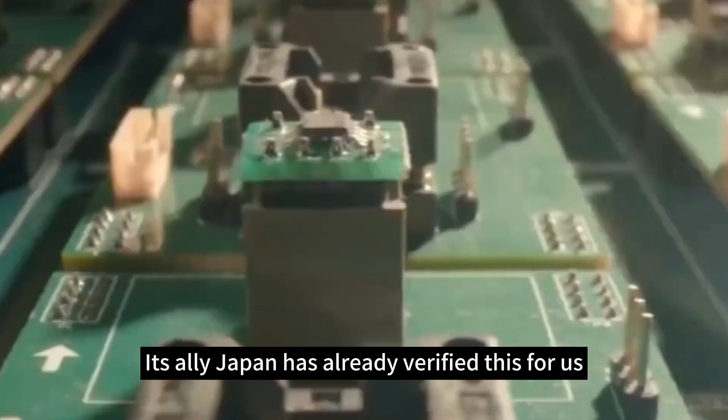In the 1980s, Japan spared no effort to support this leading industry, but the US immediately pressed the stop button on Japan's semiconductor development. They forced the Japanese government to sign the US-Japan Semiconductor Agreement, taking away Japan's exclusive technology at the time. In the face of interests, the so-called alliance is nothing more than a victim that can be abandoned at any time. Although Japan's semiconductor industry cannot be said to have collapsed, it no longer has its former glory and has suffered a major blow.

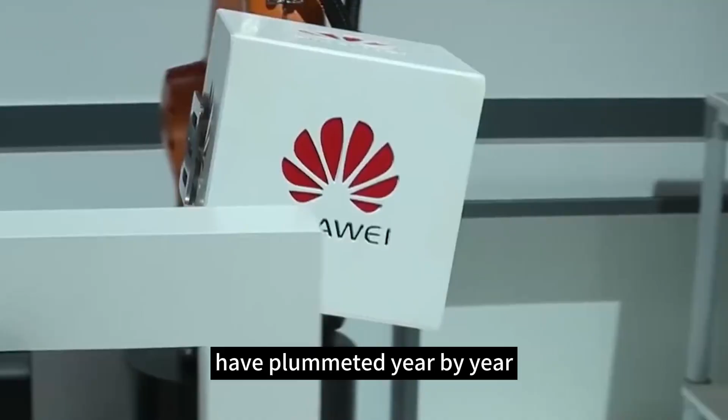Since the start of the Sino-US chip war, with the continuous development of local enterprises in China, Chinese-made chips have slowly begun to circulate domestically. As a result, the profits of Samsung, South Korea's leading company, have plummeted year by year. The United States has also continued to carry out sanctions against South Korea, and Samsung faces huge fines.

This time it is China's turn to develop its manufacturing industry. Like Japan, the development momentum is quite rapid, but China is different from Japan — China is no one's ally. China's leading companies, represented by Huawei and ZTE, show this clearly. From Meng Wanzhou's detention on trumped-up charges, we could guess that Huawei had not been forgiven. Even if Ren Zhengfei flew to the United States in person to apologize, it would be of no avail. This company no longer represents only Huawei itself, but the embodiment of China's advanced manufacturing industry. Therefore, it is impossible for the United States to let it go — let alone China, which is taking American profits. The United States itself values Huawei's place in this industry even more than China does.

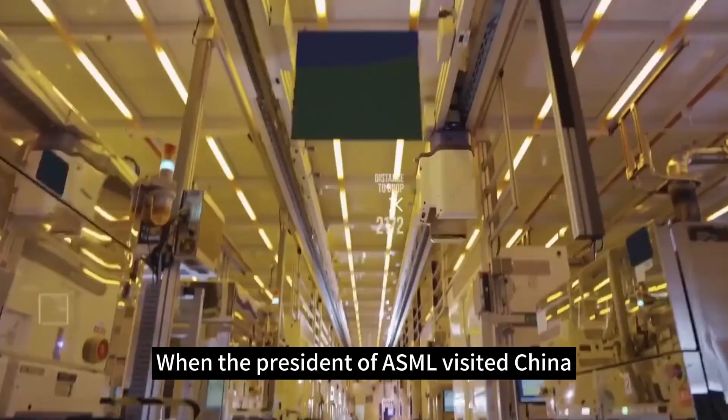But why did the U.S. sanctions only last for such a short period of time? When the president of ASML visited China, he personally said he had obtained a license to supply chips to Huawei — it had only been a few months. Sanctions against China are equivalent to draining their own firepower. What the US lacks most is this kind of tenacity.

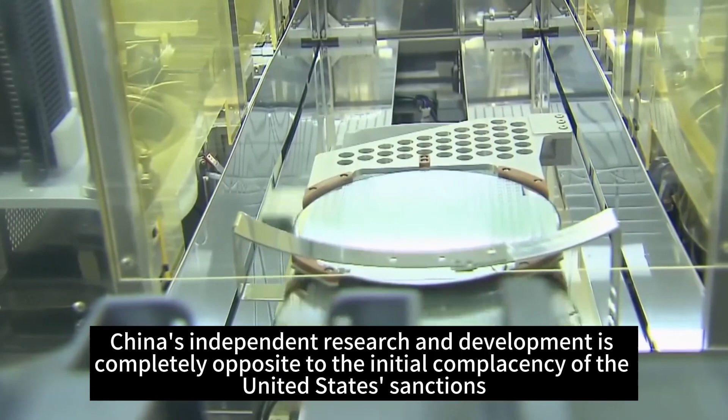Seeing Huawei invest hundreds of billions to build HiSilicon, watching them analyze data and design their own systems — China's independent research and development is completely opposite to the initial complacency of US sanctions. Coupled with the loss of order market from Qualcomm and ASML to China, the United States began to reflect on its own sanctions policy.

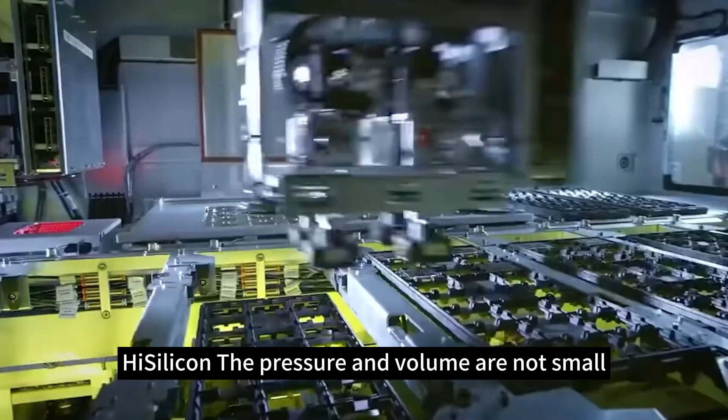After careful consideration, the Americans decided the best option was to lift some restrictions and sanctions. Why? Restoring the supply of Qualcomm and ASML can squeeze MediaTek's current share in the high-end market, allowing them to continue opening up the Chinese market. Instead, they want to use this opening to get Huawei to voluntarily give up HiSilicon's independent research and development. After all, the pressure and volume of HiSilicon are not small, and Huawei's recent financial report is not very good — so maybe Huawei will automatically give up on the gold-eating beast that is HiSilicon.

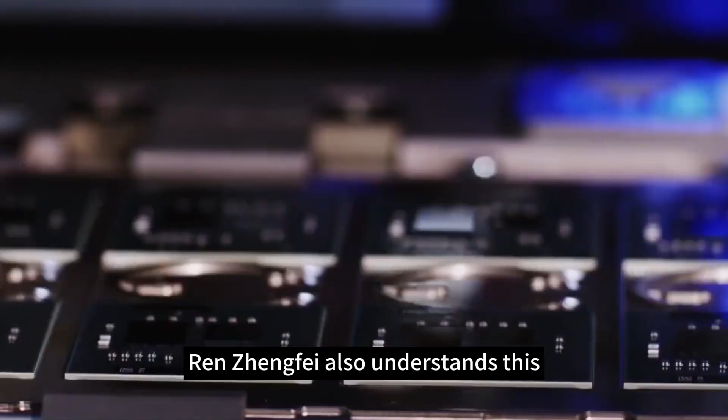Of course, Ren Zhengfei also understands this. For Huawei, which has already spent hundreds of billions and carries too many expectations, there is no way to force them to give up now. China is not a weak country — it will never be willing to be subordinate to others, and it is also impossible to be controlled by others. Therefore, Ren Zhengfei made it clear that HiSilicon has no profit requirements and will not reduce its personnel.

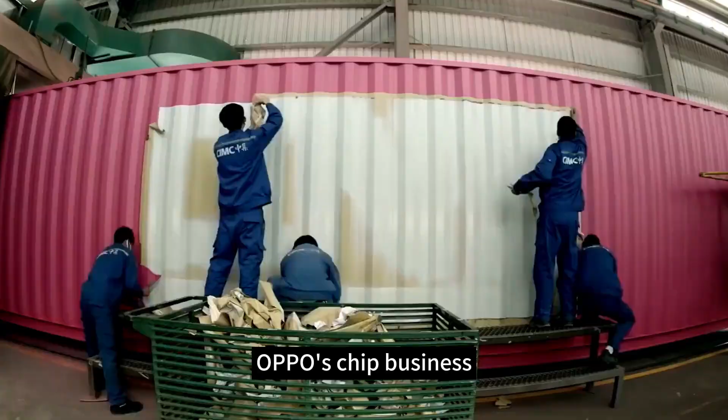When the United States launched sanctions, it was afraid that it would be the next to be sanctioned. OPPO's chip business, which invested 50 billion yuan in research and development, was also forced to shut down. This must be a helpless move for the company if they want to continue to survive. Relatively small companies have no choice but to give up.

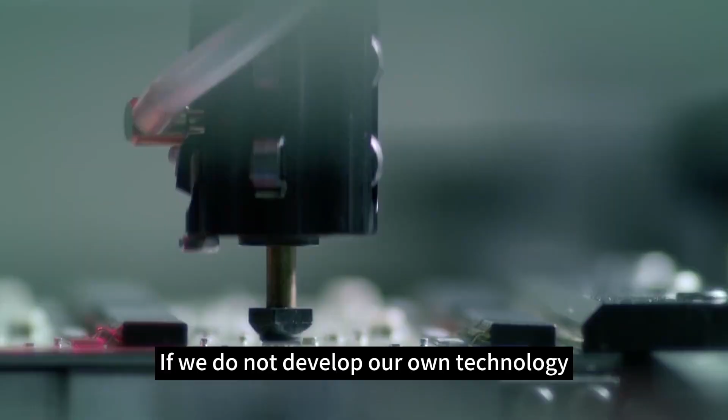These hegemonic hands have been stuck on the necks of the Chinese people for too long. If we do not develop our own technology, if we are blinded by the sugar-coated bullets of temporarily lifting the ban today, in order to save money, we choose to rely on imports. If a conflict occurs, we will still be dumbfounded in this war without gunpowder.

The Japanese government volunteered to ban the supply of various equipment from its own country to China in order to express its unconditional support for the United States' decision. With the lifting of the ban on Qualcomm and ASML, Japan has become the biggest joke. Not only was it stabbed by its ally the United States, but it also gave up its market share to it in vain.

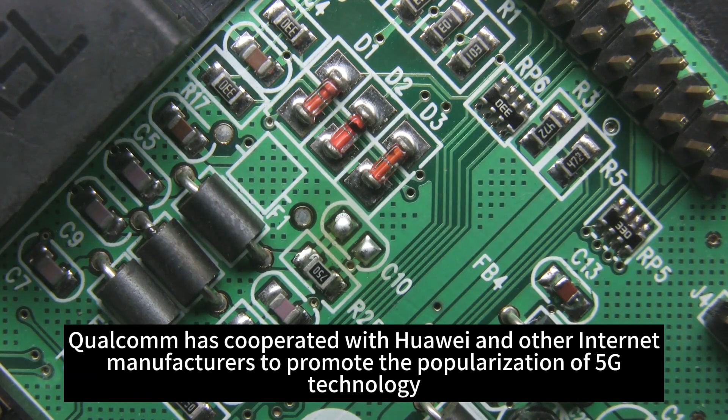The history of cooperation between Qualcomm and Huawei can be traced back many years. Qualcomm has cooperated with Huawei and other internet manufacturers to promote the popularization of 5G technology. Due to the ban imposed by the U.S. government on Huawei, U.S. companies such as Qualcomm have had to interrupt their supply to Huawei. This has led to bottlenecks in Huawei's production and business.

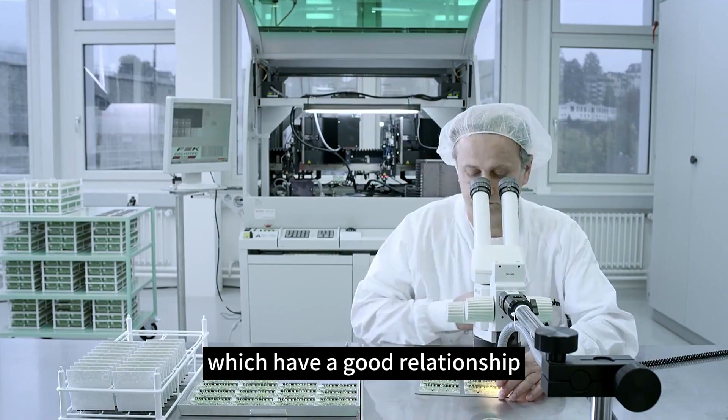It is expected to alleviate the supply chain pressure faced by Huawei and help Huawei accelerate the development of its 5G business. Going forward, resuming supplies to Huawei would also benefit Qualcomm. In addition, the cooperation between Qualcomm and Huawei, which have a good relationship, has also brought more opportunities and challenges to the two companies, supporting the resumption of supply to Huawei.

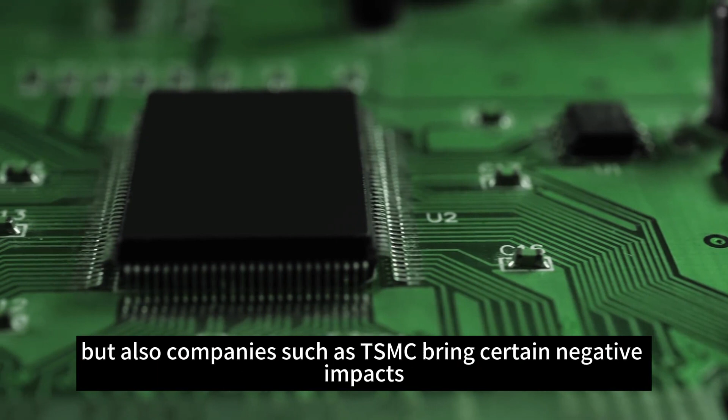As one of the world's largest foundries and semiconductor manufacturing companies, TSMC is very sensitive to the U.S. government's sanctions and controls on Chinese companies such as Huawei, because the U.S. government's actions will not only affect Chinese companies such as Huawei, but also bring certain negative impacts to companies such as TSMC.

With the outbreak of the COVID-19 epidemic and the downturn of the global economy, various countries are strengthening the development of local industries, and also proposing more economic protectionist policies. These policies will not only have an adverse impact on international trade, but also potential negative impacts on the semiconductor industry.

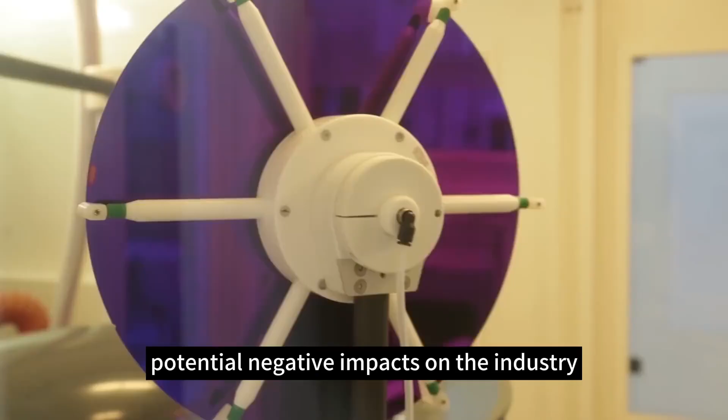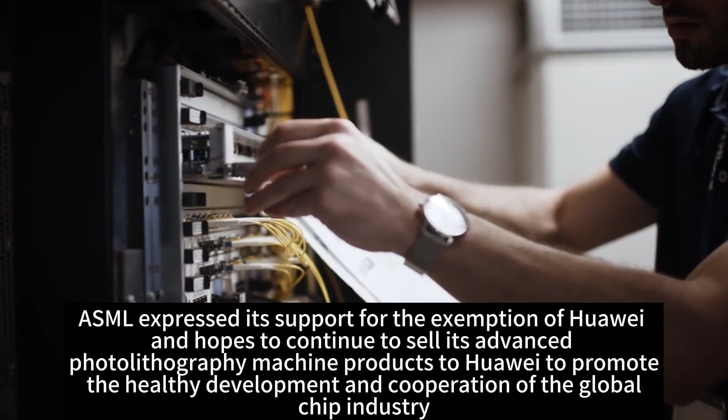The lithography machines it manufactures play a very important role in the chip manufacturing process. The U.S. government's controls on Huawei also include restrictions on the company's ability to purchase U.S. equipment and technology. Therefore, Huawei cannot purchase ASML products, which is also a loss for ASML. ASML expressed its support for the exemption of Huawei and hopes to continue to sell its advanced photolithography machine products to Huawei to promote the healthy development and cooperation of the global chip industry.

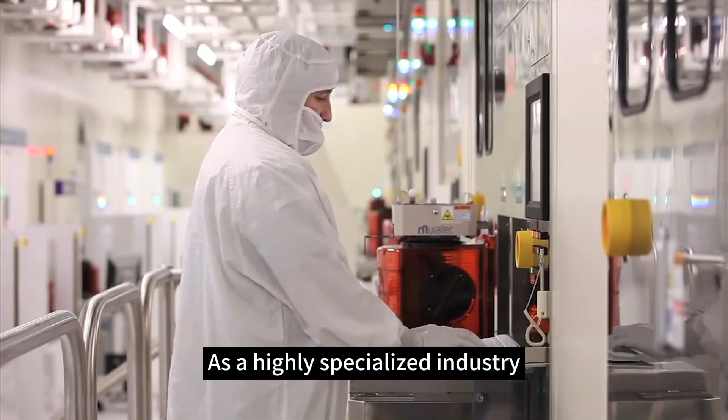Openness and cooperation are the keys to advancing technology and industry. Enterprise cooperation is the key to the healthy development of the semiconductor industry. The semiconductor industry is the most competitive industry in the world, including manufacturing, foundry, design, testing and many other aspects, as a highly specialized industry. The semiconductor industry often requires close cooperation between various enterprises to ensure product quality and production efficiency.

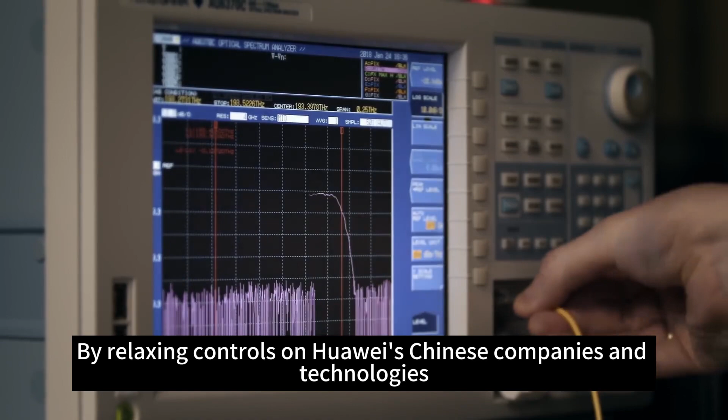Especially in the current global economic downturn, companies are eager to find new business opportunities and seek more development opportunities. By relaxing controls on Chinese companies and technologies like Huawei, we can promote multi-party cooperation and jointly promote the development of the global semiconductor industry. Qualcomm's resumption of supply to Huawei and the statements of companies such as TSMC and ASML have provided the semiconductor industry with more cooperation opportunities and development space.

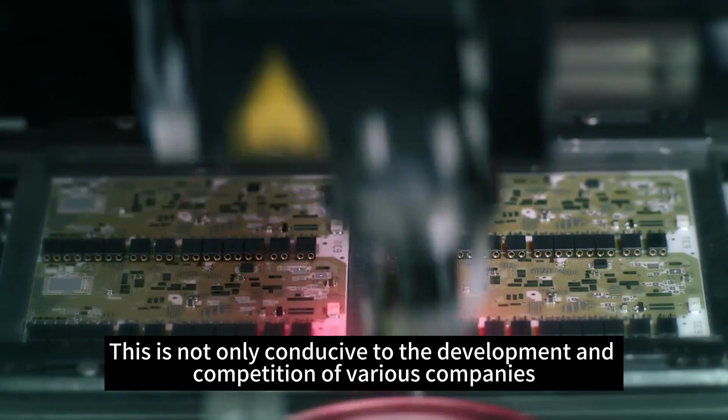This is not only conducive to the development and competition of various companies, but also conducive to promoting the healthy development and cooperation of the global semiconductor industry. Only continued openness and cooperation can bring more opportunities and challenges to the semiconductor industry, and promote the continuous progress and breakthroughs of semiconductor technology.

China has made good news in the chip field, and good news about breakthroughs is emerging one after another. For example, the first Chinese-made 7nm GPU chip was launched in Shanghai. A Chinese company released a fully self-developed cloud 7nm chip, and even an automobile manufacturer developed a 7nm cockpit chip.

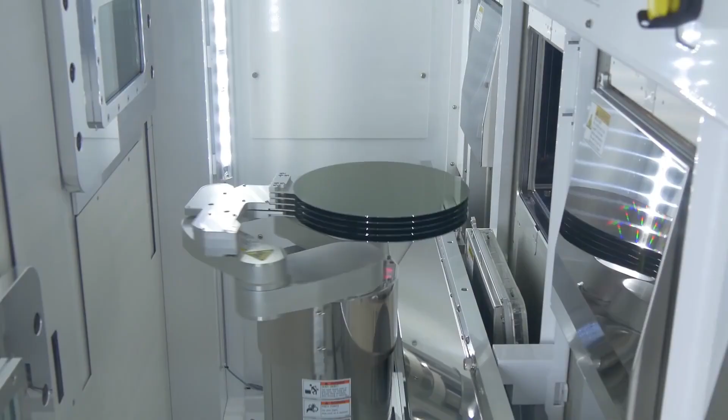Is Chinese chip technology really that powerful? Even SMIC has not broken through the restrictions. How did other unknown companies do it?

Is this really true? In fact, the sources of information are all true, and Chinese companies have indeed launched related products, but this does not mean that Chinese chips have solved the stuck problem.

For example, SMIC has not yet purchased an EUV lithography machine, since the Netherlands has made it clear that it sees no hope for the development of Chinese chips. SMIC may not even be able to buy a DUV lithography machine.

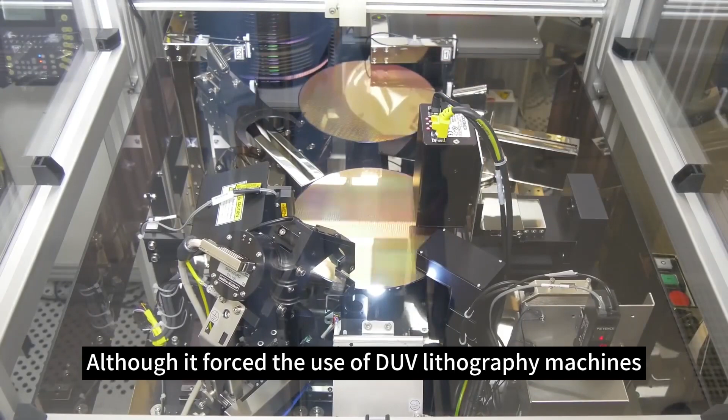SMIC plans to use DUV lithography machines to forcefully break through US chip restrictions. Although it forced the use of DUV lithography machines, SMIC can use other technologies to make up for it. Now it seems that there is no possibility of making up for it.

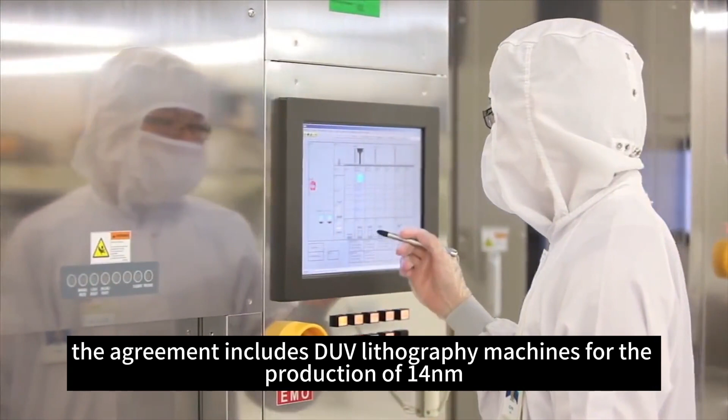Indeed, as the United States joins forces with the Netherlands and Japan, the agreement includes DUV lithography machines for the production of 14 nanometers. If SMIC does not have the support of this kind of DUV lithography machine, even if it has a new solution to solve the problem of 7nm chips, it will still be unable to produce 7nm chips. But here comes the question, is it true that it claims to have made a major breakthrough in the field of 7nm chips?

Tianshu Zhixin has released a cloud-based 7nm GPU chip product. The so-called GPGPU is a general-purpose graphics processor, which is a chip specially used to handle graphics computing and high-performance computing. This chip will also be used in the field of artificial intelligence in the future.

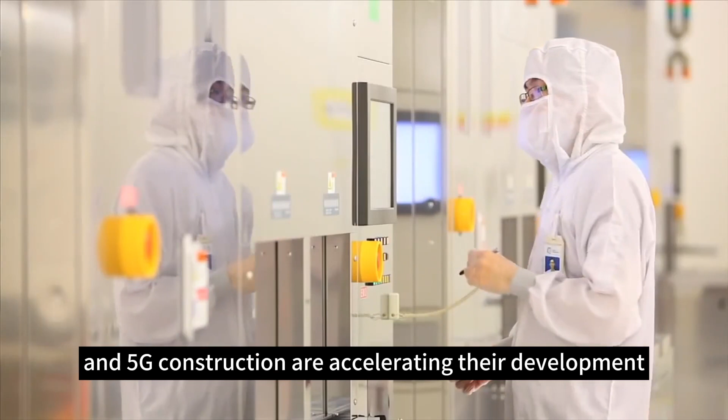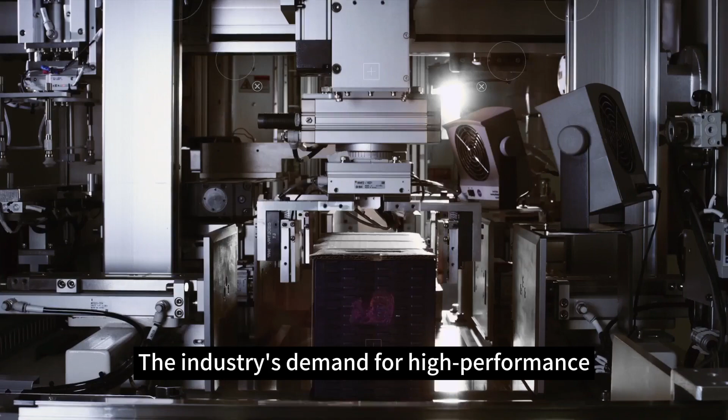Diao Shijing, chairman of Tianshu Zhixin, said that in today's context, where new infrastructure industries such as cloud computing, data centers, and 5G construction are accelerating their development, they are continuing to concentrate on the cloud, spread to the frontier, and sink to the end. The industry's demand for high performance, high energy efficiency, and cost-effective computing power has increased exponentially. The cloud 7nm chip products created by Tianshu Zhixin are designed to enhance China's strength in this area and make us comparable to leading international manufacturers.

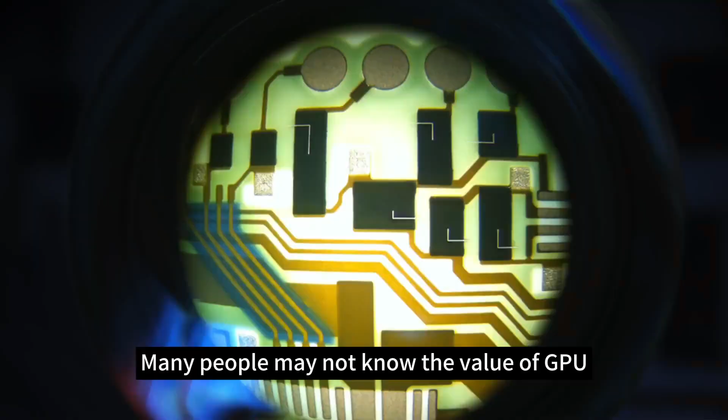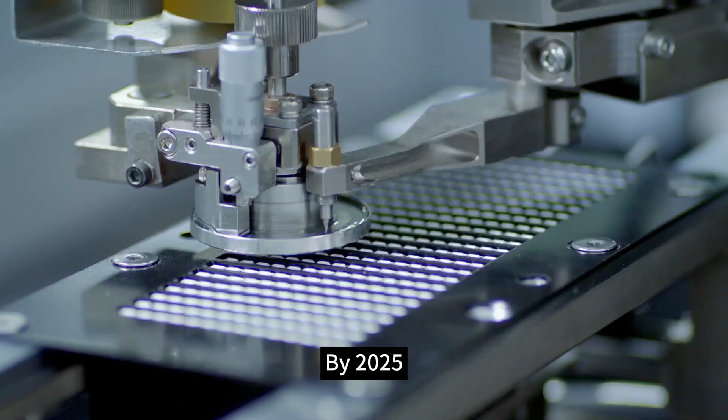Many people may not know the value of GPU, no concept. In reality, the current price of a high-end GPU version from a leading supplier is close to the price of an ordinary car. By 2025, China's GPU chipboard market will reach 45.8 billion yuan, with a compound annual growth rate of more than 30% from 2019 to 2025.

From CPUs, operating systems, office suites, complete machines to servers, China has initially developed some commercially available independent innovative products, but there is still room for breakthroughs in the GPU field, which has been monopolized by giants such as Nvidia and AMD in the United States.

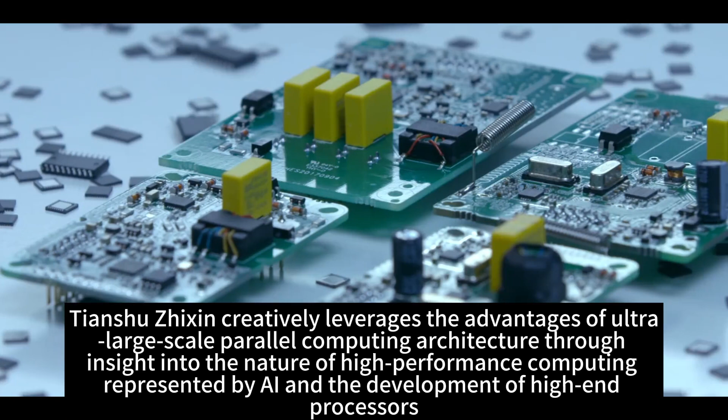As China's first hard technology company focusing on GPU chip high-performance computing systems, Tianshu Zhixin creatively leverages the advantages of ultra-large-scale parallel computing architecture through insight into the nature of high-performance computing represented by AI, and the development of high-end processors, and develops the self-controllable, first-class universal standard high-performance cloud GPU computing chip, filling the gap in China's GPU industry.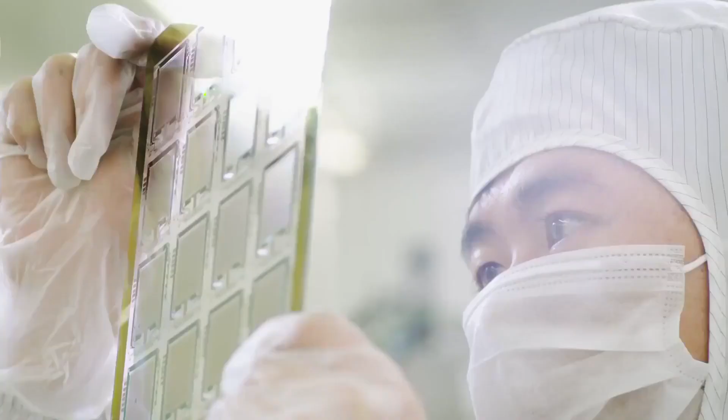The product was successfully lit in December 2020. Over the past month or so, the Tianshu Zhixin technical team has conducted a series of tests on nearly 100 indicators, including hardware and software, to verify that the actual functions of the product meet the design standards.

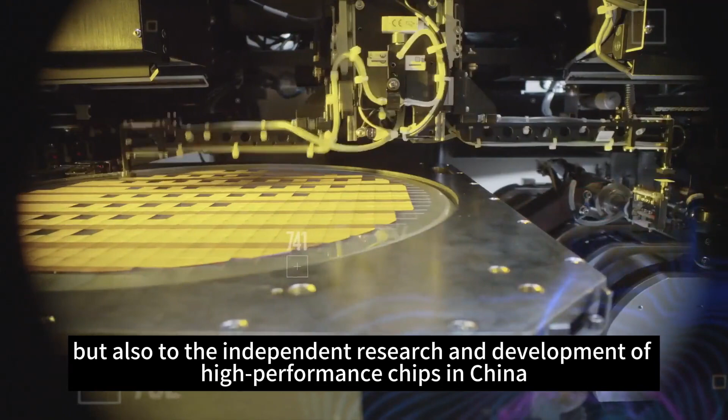The BI chip can accommodate 24 billion transistors and can complete artificial intelligence processing of hundreds of cameras and video channels per second, with performance up to twice that of mainstream products on the market. The lighting up of the BI chip is of great significance not only to Tianshu Zhixin, but also to the independent research and development of high-performance chips in China. It will enhance the independent controllability of China's industrial chain and supply chain.

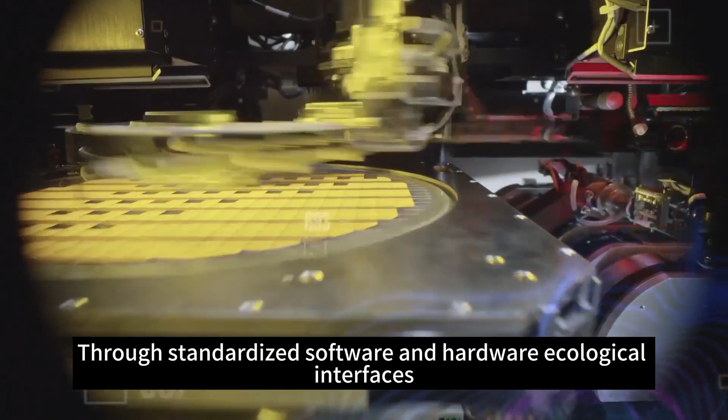Since the development of the Cloud 7nm GPU chip, the BI chip has been a one-time success in just 2 years. The BI cloud training chip illuminated this time can provide artificial intelligence and related vertical application industries with computing power that matches the rapid development of the industry through standardized software and hardware ecological interfaces. It can help the application industry solve problems such as difficulty in product use and high development platform migration costs, pain points at the operational level.

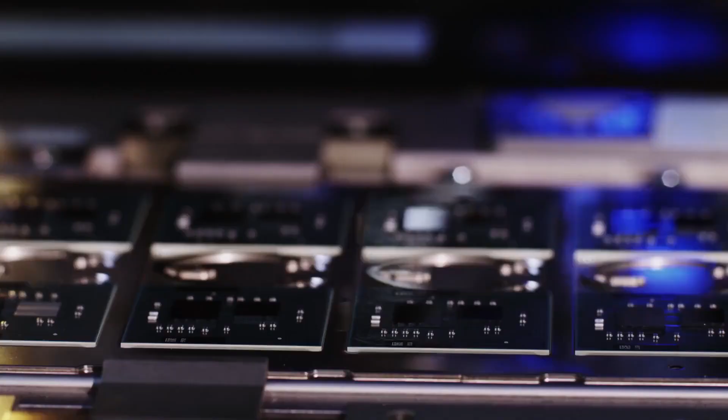In addition, there is also the Zhikai 100, used for mass production of AI inference chips, and the development of second and third generation AI training chips, Tiangai 200 and 300, the first 7nm chips, launched by Tianshu Zhixin.

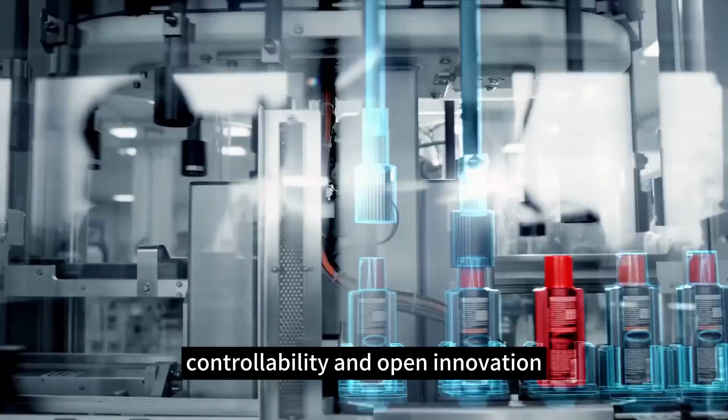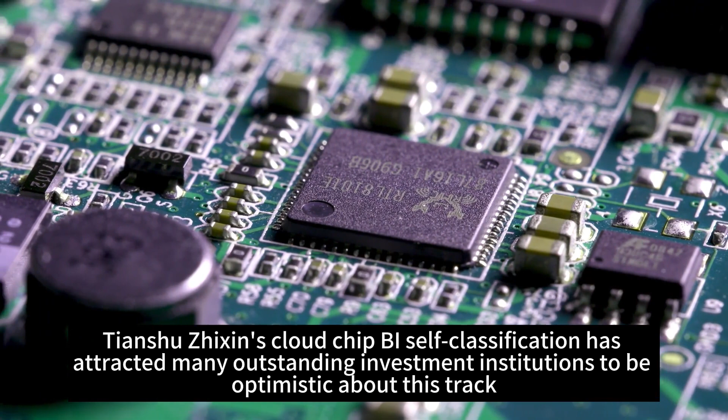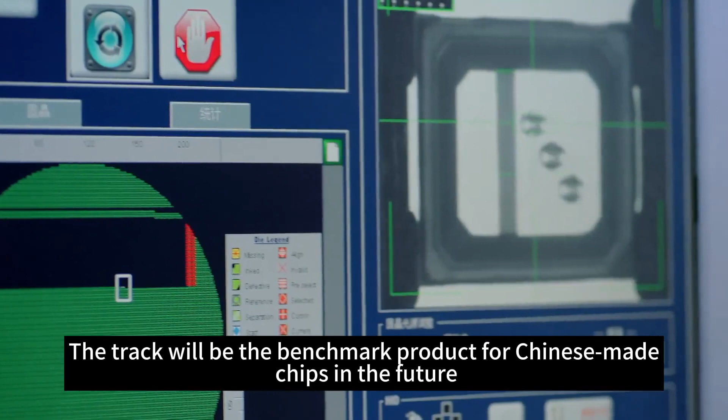Tianshu Zhixin's cloud chip BI has attracted many outstanding investment institutions to be optimistic about this track. It is a company with actual chip products based on GPU architecture, a world-class general-purpose parallel high-performance chip. The general-purpose parallel GPU cloud training chip it developed is positioned as a general-purpose high-performance computing chip with high barriers to entry, and will be the benchmark product for Chinese-made chips in the future.

We are optimistic about the technical strength and growth potential of Tianshu Zhixin and hope to develop together with enterprises and build an ecosystem together.

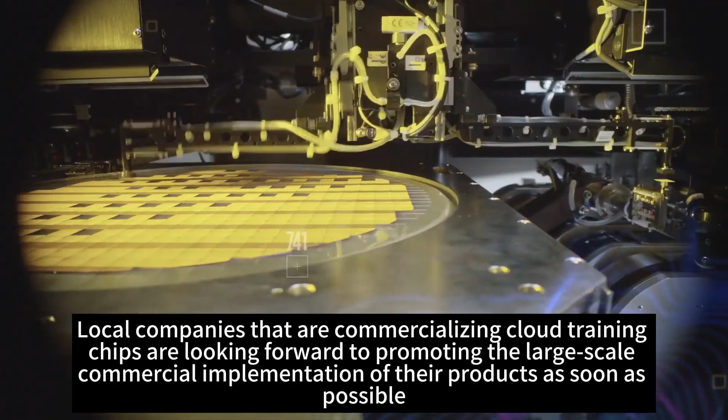The rapid development of 5G applications and the construction of new infrastructure will continue to increase the demand for massive computing. Local companies that are commercializing cloud training chips are looking forward to promoting the large-scale commercial implementation of their products as soon as possible.

Such good news from China is not fake news. This is also a breakthrough and progress made by China in the chip field.

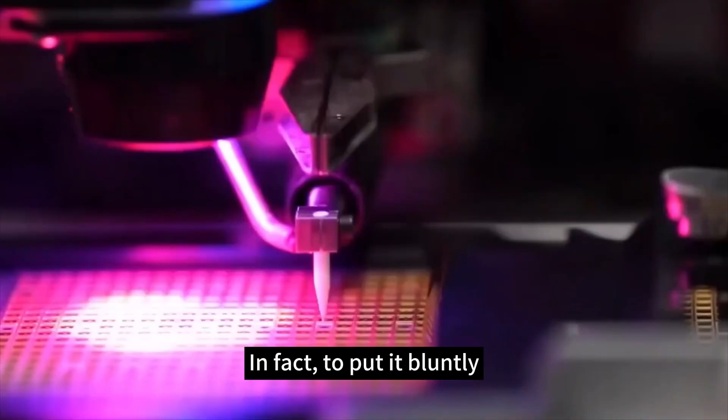However, according to foreign technical reports, the so-called chip manufacturing process is just numbers. On the contrary, the process chips of these top chip manufacturers also have a lot of moisture in them. To put it bluntly, it is about the width of the chip. Regardless of Samsung, there is a certain degree of moisture in their chip manufacturing process figures.

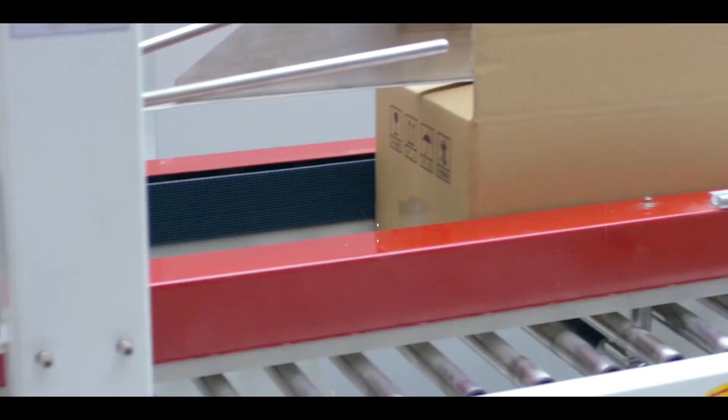For example, Intel's once proclaimed 14nm chip was actually only 24 nanometers according to expert measurements. TSMC's 16nm chip measured 33 nanometers, with an actual line width of only 30 nanometers. So it is not difficult to see that the so-called 3nm or 7nm chips now also have a certain degree of moisture in the chip manufacturing process.

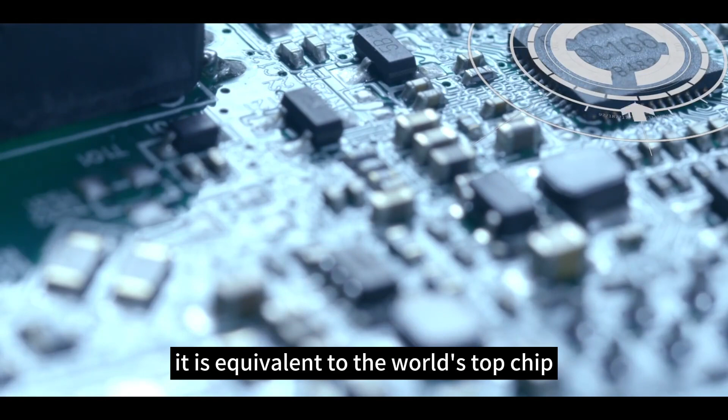But the term world's top is undeniable, because even the so-called 7 nanometers are only 14 nanometers in width. As long as its performance can beat other chip manufacturers, and its stability is not inferior to any chip products, it is equivalent to the world's top chip, and it is not a fiction. China's world's top 7 nanometer Chinese-made chips have been officially unveiled, which is undeniable.

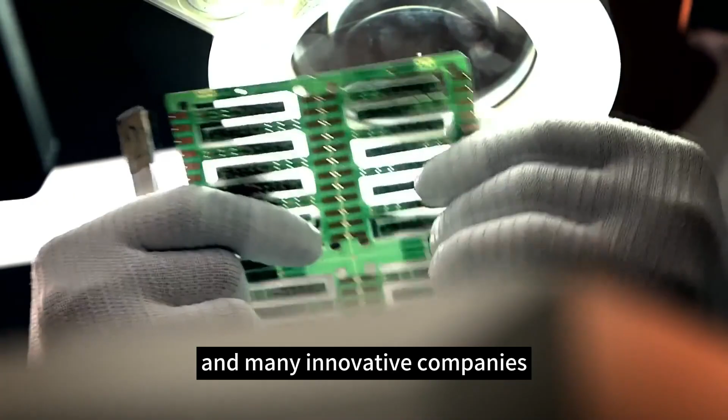Nowadays, there are many GPU players in China, and many innovative companies, including Tianshu Zhixin, continue to make efforts in financing and product commercialization. China's GPU innovation companies will gradually transition from competition for capital and talent to a new stage of competition, in product competition and market competition.

The road to local self-developed chips is often arduous and full of risks for these startup teams. In addition to developing chip products that satisfy customers, how to find a living space in a market dominated by giants, and how to build their own ecology are all important challenges that need to be overcome on the road to future commercialization.

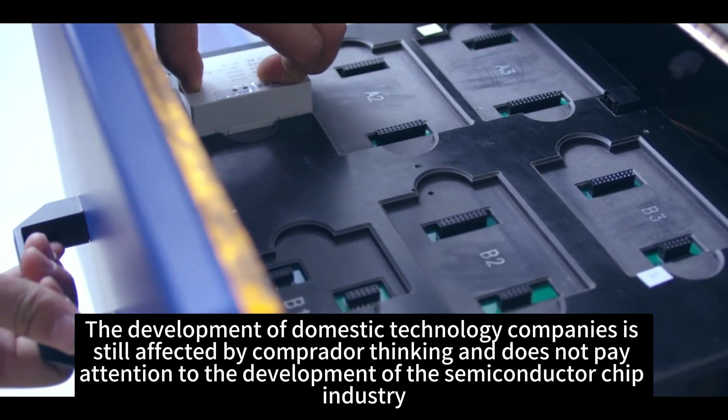China's Huawei has always been the leader of Chinese technology companies. The development of domestic technology companies is still affected by comprador thinking and does not pay attention to the development of the semiconductor chip industry.

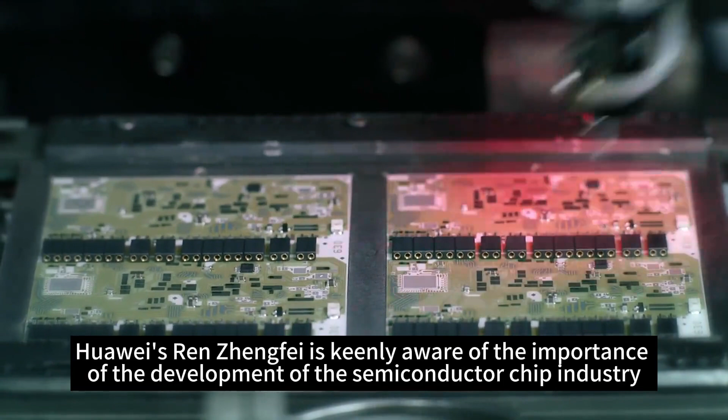Huawei's Ren Zhengfei is keenly aware of the importance of the development of the semiconductor chip industry. In terms of investment, HiSilicon Semiconductor Company was established within Huawei. Huawei's investment in HiSilicon Semiconductor has been increasing year after year, although Huawei has been suppressed by the United States in the field of semiconductor chips.

Huawei still has not given up on HiSilicon in terms of chip research and development, especially Huawei's HiSilicon. The comprehensive experience of its Kirin chips based on the 5nm process completely surpassed Qualcomm at the time, and with the support of the Kirin chip business, Huawei's mobile phone sales once surpassed Apple's, becoming the second largest mobile phone brand in the world.

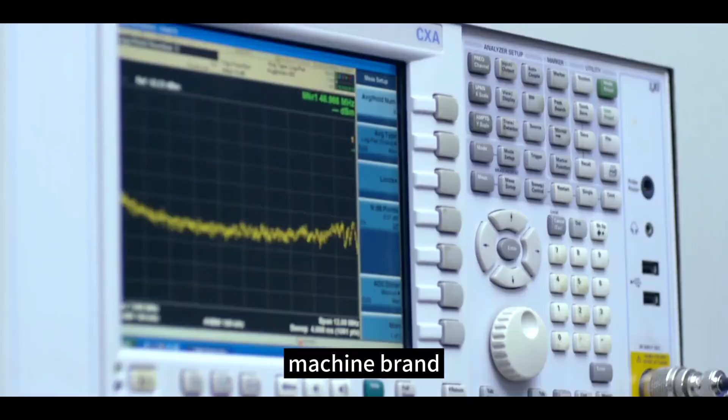However, in terms of chip manufacturing, the early comprador mentality was deeply rooted in people's hearts. In order to achieve quick profits, many companies did not want to invest too much in research and development. Some directly imported products, and some erased the trademarks of other people's products and put their own labels on them.

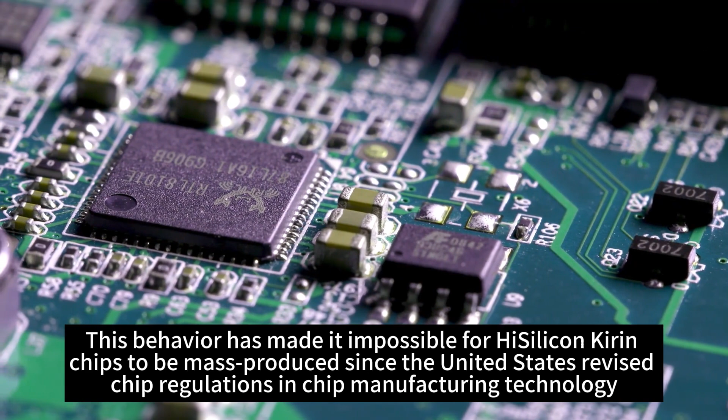This behavior has made it impossible for HiSilicon Kirin chips to be mass-produced since the United States revised chip regulations in chip manufacturing technology. You must know that the research and development of semiconductor chips is a very complicated process

and requires a large amount of research and development funds. Now, under the pressure of the United States, the advanced Kirin processor chips developed by Huawei HiSilicon cannot be produced.

This also means that in order to produce Kirin chips only on paper, Huawei has to invest a large amount of R&D funds in HiSilicon every year. In addition, there are huge salary expenditures.

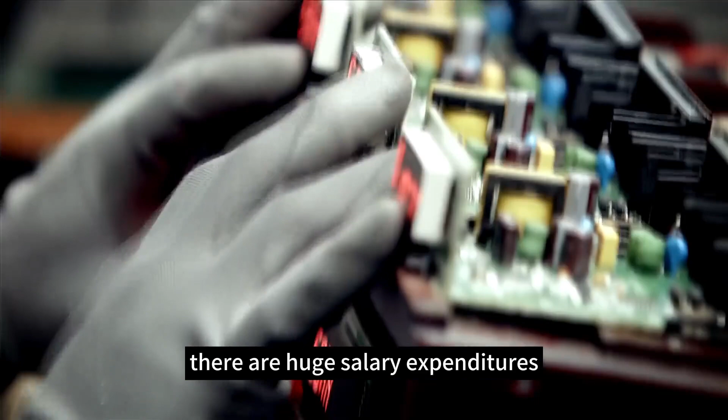HiSilicon Semiconductor seems to have become a burden, although it has long been established. After TSMC stopped producing chips for Huawei, Huawei's HiSilicon Kirin processors became absolutely inferior.

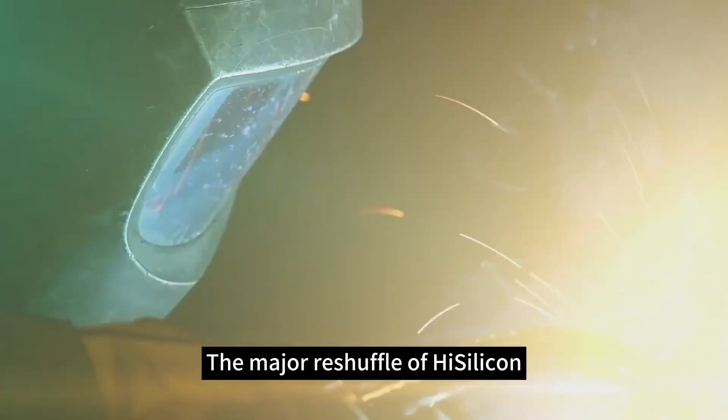Nowadays, the inventory of Kirin chips is depleted, and Huawei's chips cannot escape their fate. Huawei has publicly stated that it will use limited chips to extend the life cycle of its mobile phone business indefinitely. The major reshuffle of HiSilicon, which lacks foundry services, has finally ushered in an expected result.

According to the 2022 Q2 mobile phone SoC market ranking data released by Counterpoint, a third-party research organization, Huawei ranks last in sales, and its share is only 0.4%.

That is, only 4 of 1,000 chips come from Huawei. Basically, it has officially returned to zero.

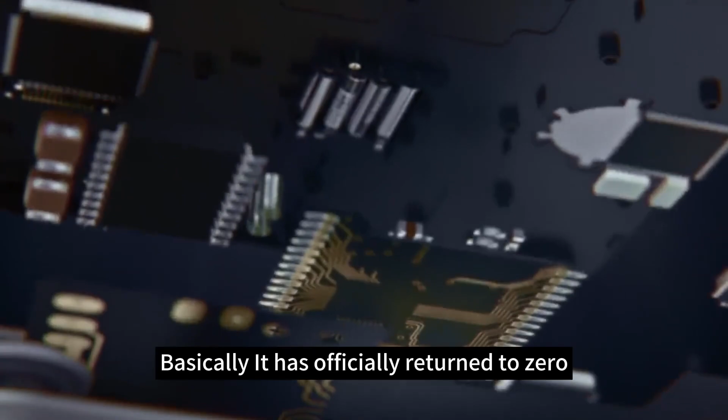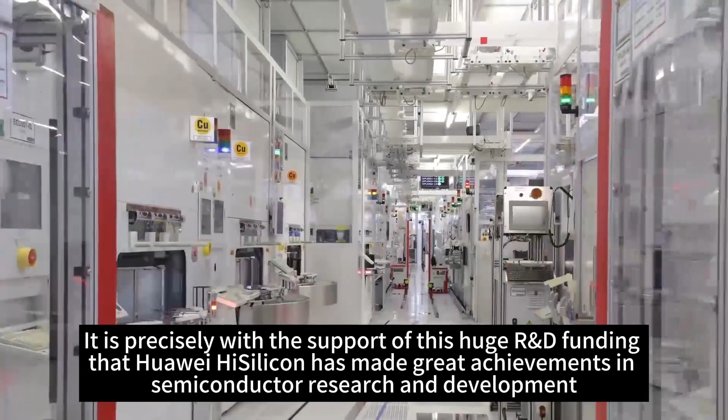Numerous achievements have been made in the field of chip research and development, but now that Huawei's HiSilicon chips cannot be produced, it is always just talk on paper.

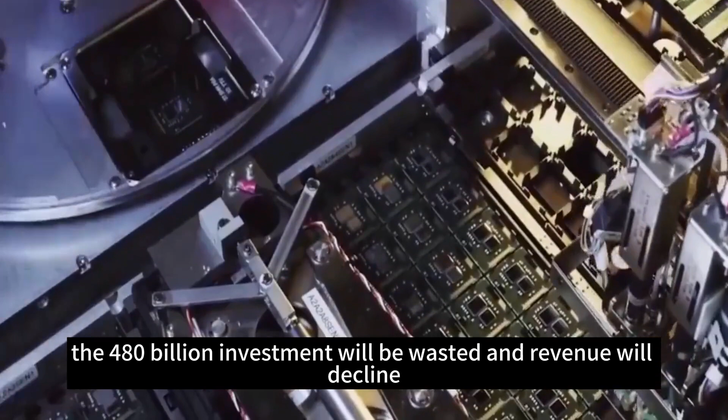Once Huawei gives up, the $480 billion investment will be wasted and revenue will decline. However, Huawei still has not given up its investment in HiSilicon, and Huawei's Ren Zhengfei also said that Huawei will

never give up the HiSilicon department. This also means that Huawei still needs to invest huge R&D funds for HiSilicon every year to support HiSilicon chip development.

Facing the dilemma of Huawei's development, Huawei soon established more than a dozen business corps, and began to carry out research and development and breakthroughs in various fields.

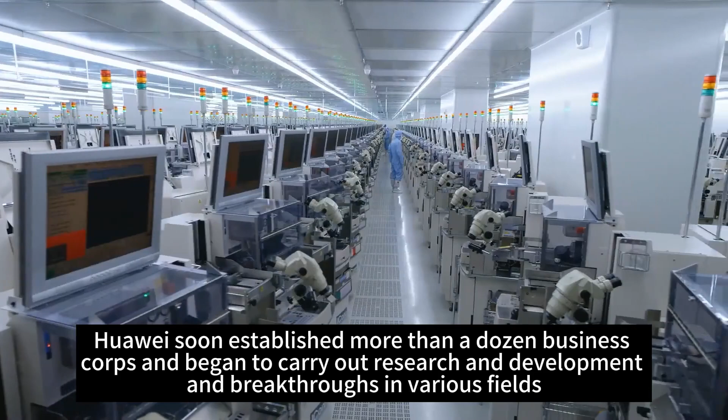Since TSMC terminated its cooperation with Huawei in 2019, Huawei has been using inventory chips for the past 2 years. Huawei mobile phones have been shipped, and it is only a matter of time before the chips return to zero.

Previously, Ren Zhengfei publicly stated that he would survive and pass the cold on to everyone. For a time, this passage was widely circulated in WeChat moments, and many people thought it was like a prophetic duck sensing the spring river's chill, but the cold weather has indeed invaded the internet industry.

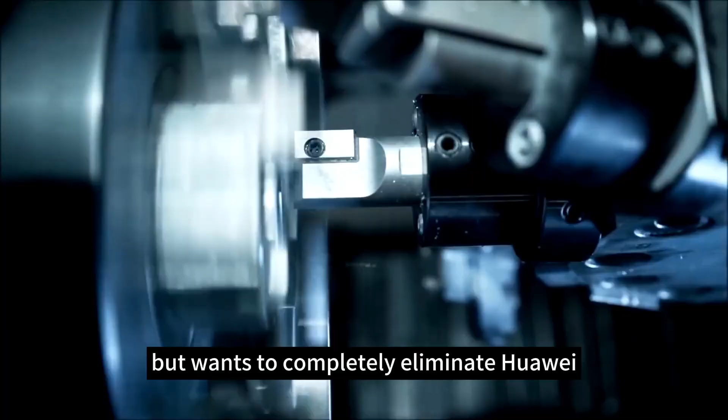The United States is not just suppressing Huawei, but wants to completely eliminate it, because Huawei has touched the roots of the United States. After being cut off from supply, Huawei's investment in HiSilicon has increased every year.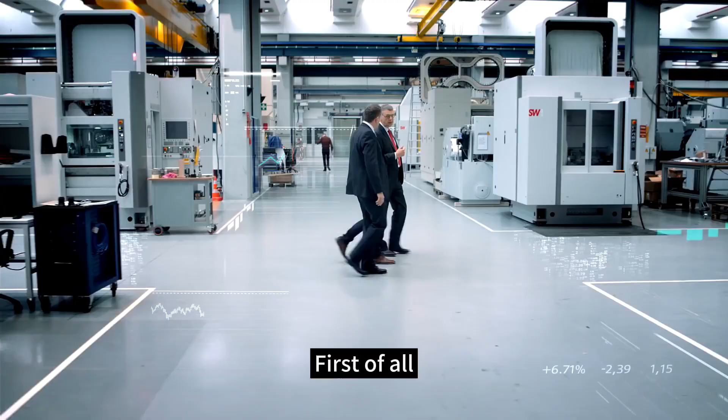First of all, its supply chain has been greatly impacted, especially in the chip field. Huawei is facing huge challenges and pressure.

Huawei has increased its investment and layout in self-developed chips, and launched a series of self-developed chip products. These chip products can not only meet Huawei's own needs, but also be sold to other customers, providing a platform for the sustainable development of the company.

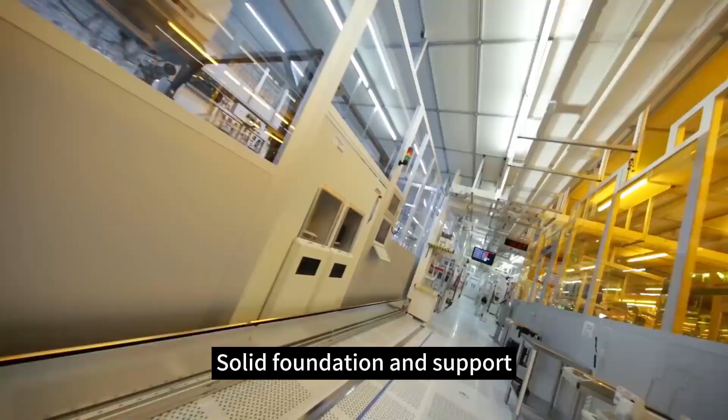With a solid foundation and support, Huawei's HiSilicon Semiconductor Company has strong technical strength and accumulated experience in independent research and development of chips, and is committed to developing various chips and system solutions, covering multiple fields such as communications, smart home,

and vehicle-mounted Internet of Things. At present, HiSilicon Semiconductor has developed a series of independently developed chip products and has had a greater impact in the market.

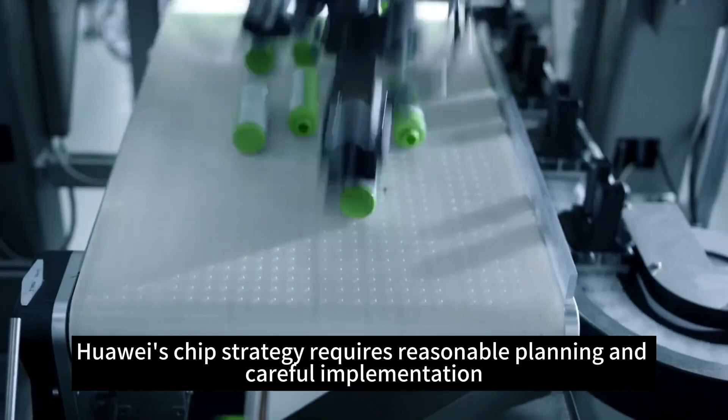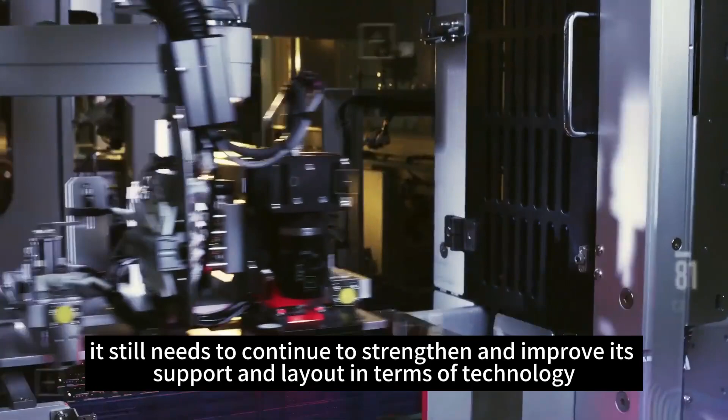If Huawei can make a breakthrough in independently developing chips, it will greatly improve the company's core competitiveness and market competitiveness. Huawei's chip strategy requires reasonable planning and careful implementation, and it cannot easily give up external cooperation and open development. Although Huawei has made many achievements in independently researching and developing chips, it still needs to continue to strengthen and improve its support and layout in terms of technology, talents, and funds.

Huawei should also adhere to the principle of open cooperation and carry out exchanges and cooperation with other technology companies to promote the healthy and stable development of the global technology industry.

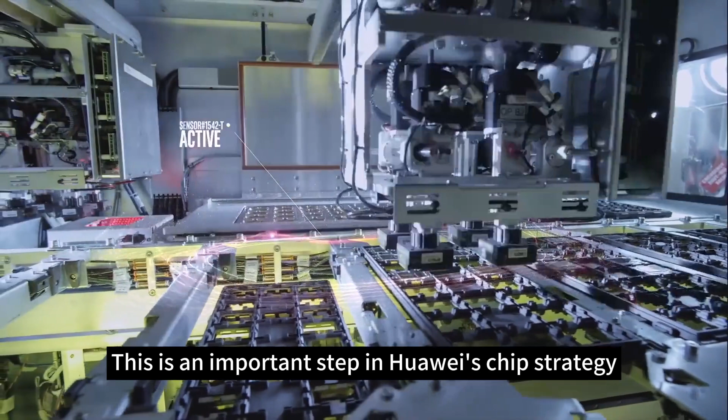In short, Huawei plans to start mass production of self-developed chips around the second half of 2022. This is an important step in Huawei's chip strategy, and it will strengthen its understanding and research of the technology industry and promote the continuous development and progress of the technology industry. Huawei also needs to carefully plan and implement its chip strategy, strengthen the balance between independent research and development and open cooperation, and provide a more solid foundation and support for the company's sustainable development.

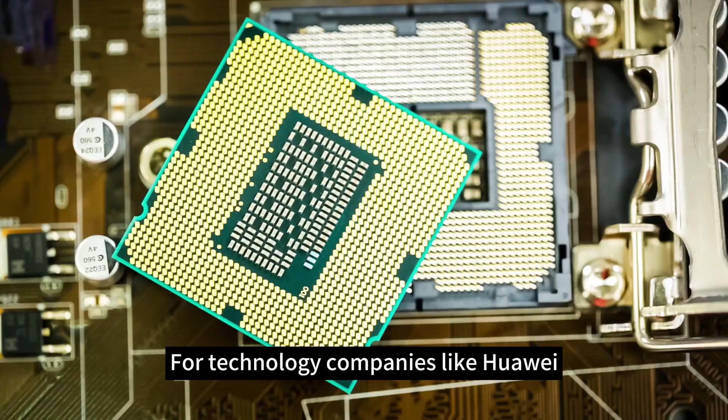For technology companies like Huawei, semiconductor chips undoubtedly play a very important role. Although HiSilicon Semiconductor is now reduced to paper talk, it does not mean that HiSilicon Semiconductor chips cannot be produced in the future. With China's continuous research and development and breakthroughs in stuck technologies such as photolithography machines, we can solve the problem, difficulties in chip production.

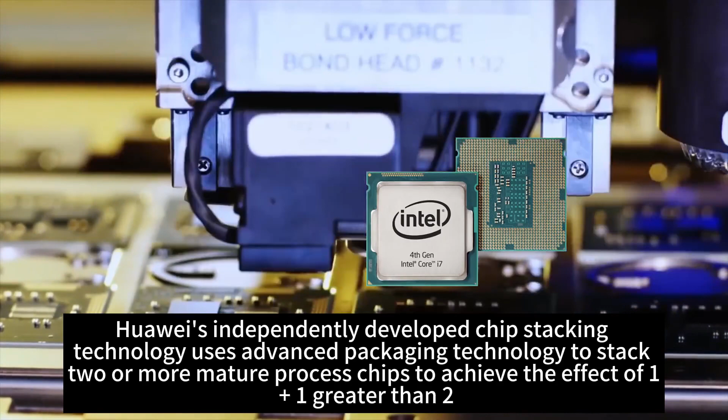Precisely because Huawei has not given up, we cannot lose confidence in the return of HiSilicon Kirin. In the past 2 years, Huawei has failed to build chips with stronger performance and has been looking for new solutions. For example, Huawei's independently developed chip stacking technology uses advanced packaging technology to stack 2 or more mature process chips to achieve the effect of 1 + 1 greater than 2.

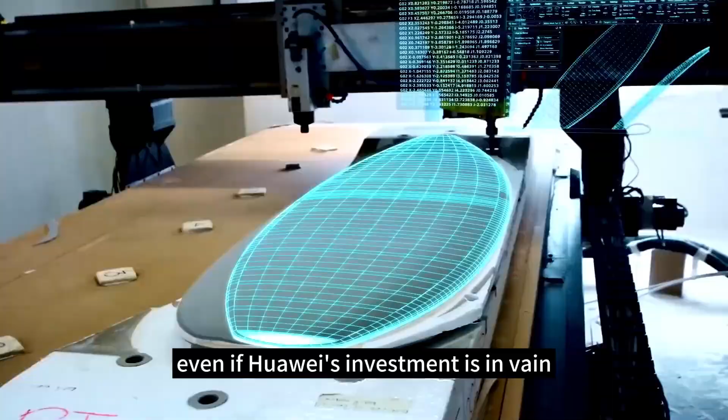At the same time, Huawei's photonic chips, with the continuous improvement of China's photonic chip, quantum chip and other production lines, I believe that Kirin chips will return as king in the near future. Therefore, even if Huawei's investment is in vain, as long as it has HiSilicon Kirin chips, Huawei will have one more trump card in its hands. No matter how hard it is, it cannot suffer from technological research and development. Let us cheer for Huawei and HiSilicon.

Demand for high-end chips has declined, and manufacturers such as Samsung have significantly reduced production capacity. TSMC plans to cut 40% of EUV lithography machine orders in 2024. Samsung's net profit plummeted 96% in the first quarter of this year, and it also announced a reduction in memory chip production capacity. Most chip manufacturers are shrinking.

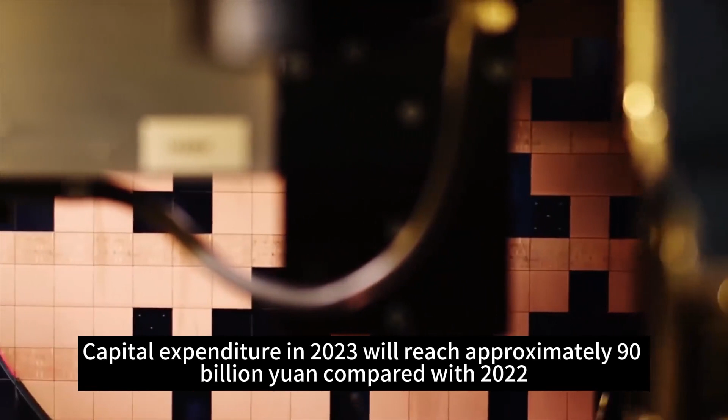There is good news from SMIC. Capital expenditure in 2023 will reach approximately 90 billion yuan compared with 2022. In addition, ASML announced that the DUV lithography machine that can be shipped can cover up to 7 nanometers. SMIC may welcome a turn.

Yu Chengdong publicly stated that Huawei can develop and design world-class chips, but China is temporarily unable to manufacture them. At the same time, it was announced that Huawei will fully enter the chip semiconductor field, just to cut off the supply of advanced processes below 14 nanometers. 7 nanometers cannot stop SMIC.

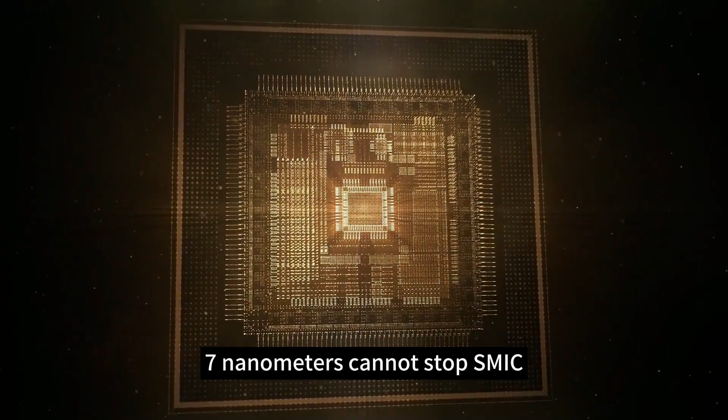First of all, the 7 nanometers research and development task has been completed. Chinese manufacturers are able to independently develop and design 7 nanometers, 5 nanometers and other chips, and even 3 nanometers process chips are in progress.

TSMC's Zhang Hongmao has publicly admitted that the chip research and development capabilities of Chinese manufacturers are very strong, and TSMC engineers have been unable to evaluate in detail the comprehensive computing power of China's automobile chips.

In addition, Liang Mengsong said as early as the end of 2020 that once the research and development tasks of 7-nanometer chips have been completed, the most difficult work of the 5-nanometer process has begun. After the EUV lithography machine arrives, the research and development of 5-nanometer chips can be fully carried out.

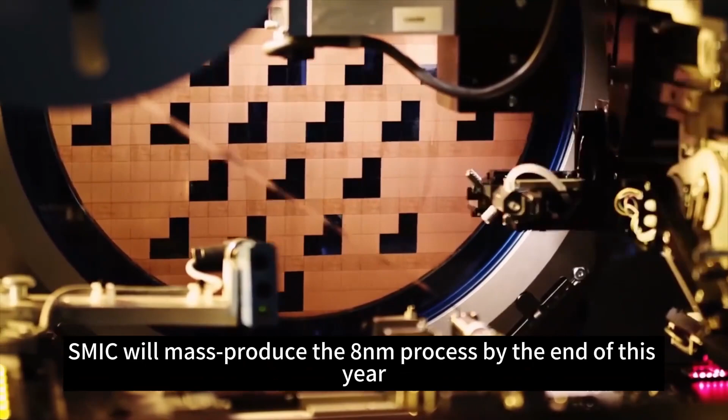The key is that SMIC has produced chips using the N+1 process on a small scale. The logic area of the chip is similar to that of TSMC, while the N+2 process focuses on high performance. SMIC will mass produce the 8 nanometers process by the end of this year. These news prove that SMIC...